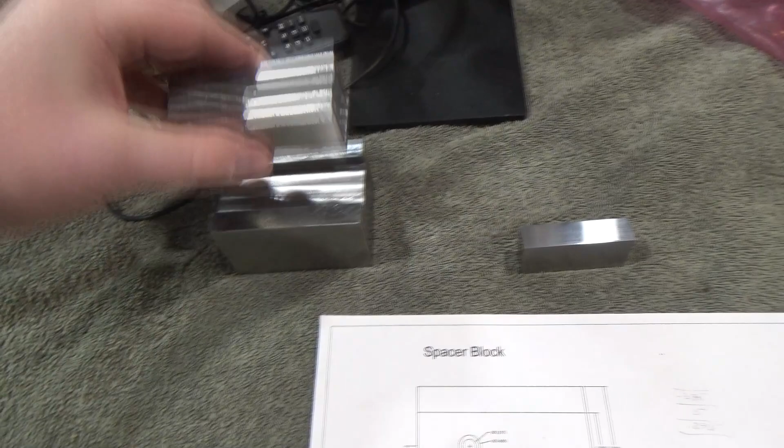I just received Tom's part in the mail, and it's looking really good. Everything's a little bit oversized so that it can be ground to match. So it's a little bit bigger than this slot is. I also made my slot narrower, so I've got to take material off here and off the outside of his part. He left 3/1000 a side to be removed so that there's a nice finish.

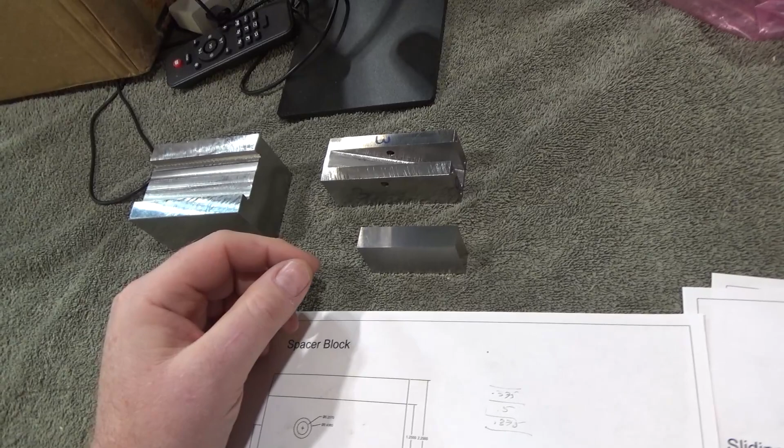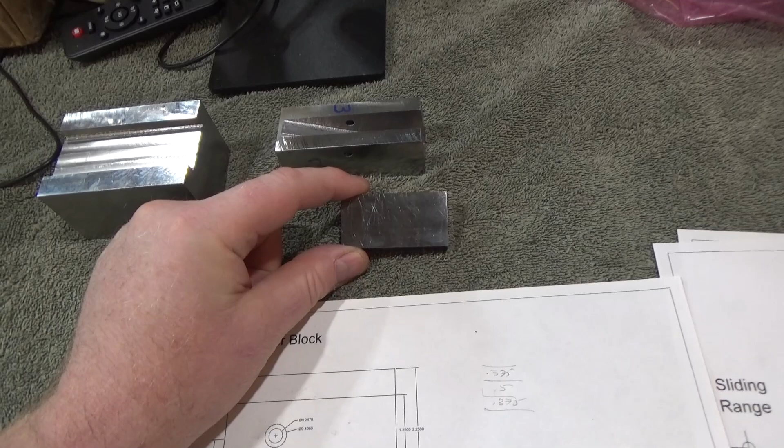And so I've just got to finish this guy here, which I've been kind of hemming and hawing at. So first we've got to drill a couple 6-32 holes in the top to mount some future option on. That was part of Maddie's design that I just carried over. I couldn't actually imagine what it was for, but I'm sure there's some good ideas associated there. And then we've got to cut the 20-degree portion off of this and then do the 20-degree slot. That is going to be challenging work holding after I get to that point.

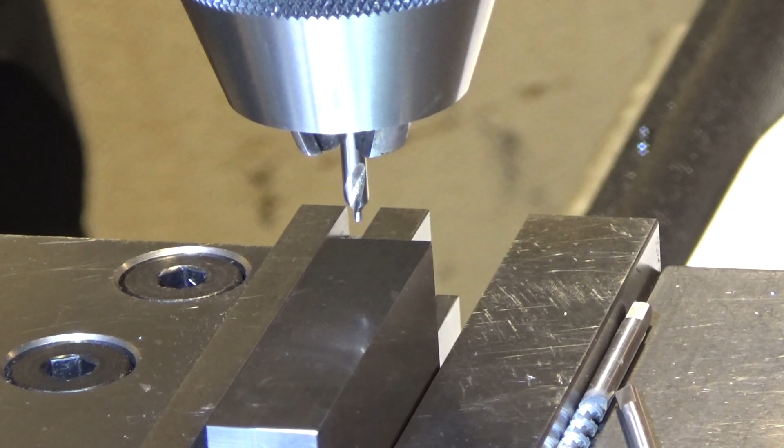So let's start with the easy part and drill and tap. And I say easy, but drill and tapping in pre-hardened material might not be so easy. Never really done it, so we'll give it a shot. So let's just drill and tap 2 holes, and I'm going to center drill them first. So I got the holes started, and I will bottom tap these. I also drilled the holes so they're only like 60% threads or 55% threads. Because of the material being pre-hardened, I wanted to give myself that little bit of a lead.

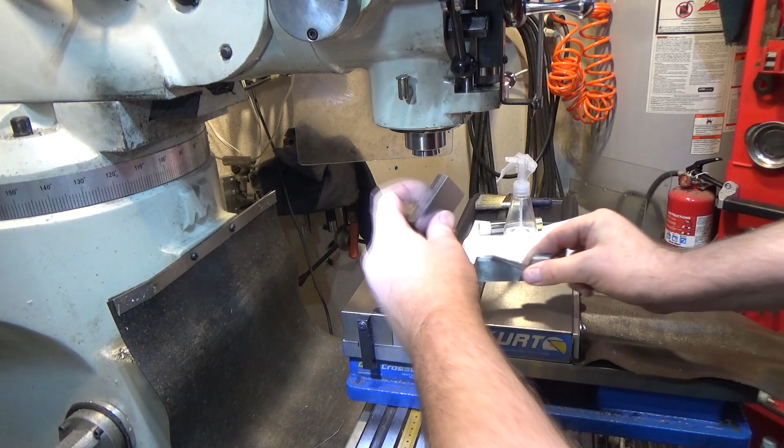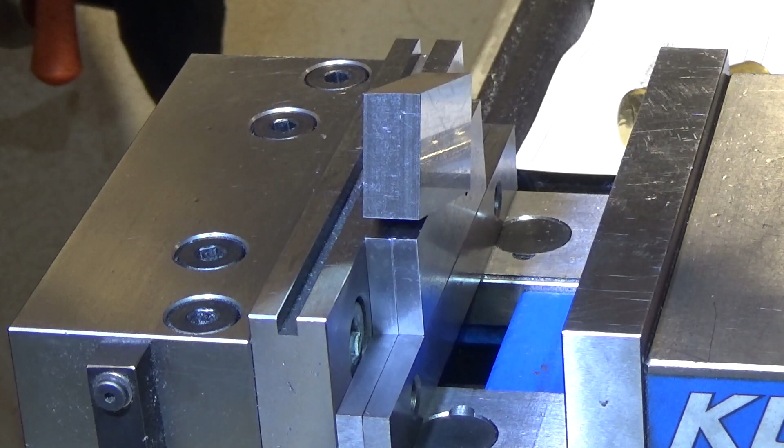So now we basically have to remove all the material until we reach the edge, put it at 20 degrees. So I've got a couple of 20-degree angle blocks with stops here, which are a very useful design. And I'm just going to set it in here. Here's a little bit closer look, and the beauty about what I've got going on here is that the thickness of the stock is 0.5040, 40 tenths over 0.5, so a couple 1/4 inch parallels, a couple 1/4 inch angle blocks won't touch the part, and I can still clamp it. Just try to see how this guy cuts.

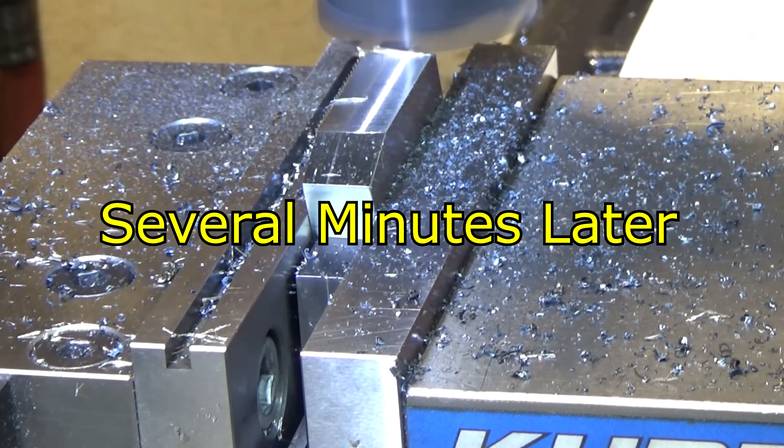So I'm double checking between cuts to make sure that the part doesn't move, because this is not an ideal way to go, but cross-cutting wasn't working very well. So pushing into the vise that direction, which makes more sense, was having a little more issues. So I found something just above my final zero, so I know when I'm getting close, and I zeroed my DRO on that, so I can slowly walk it in at that point. So we're going to do another 4/1000s. And we're going to call that good. We're going to grind the rest.

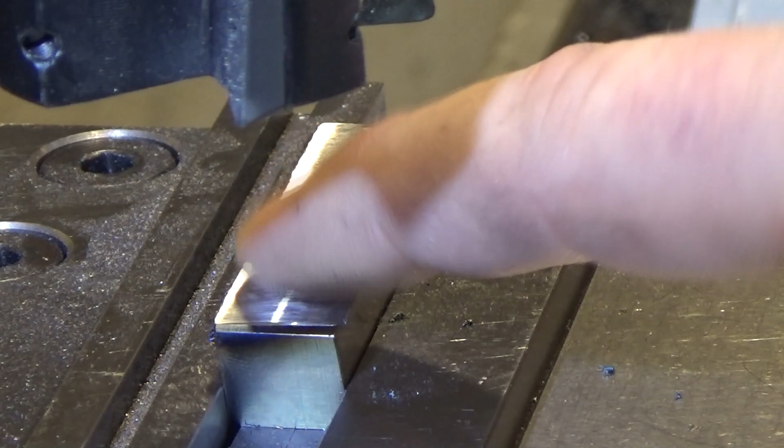So I don't know if you can see this right here. It's not a perfectly straight line. It angles back a little bit this way. And what that kind of says to me is that maybe the tram of my head has moved since the last time I trammed it, which was, I don't know, 2 or 3 uses ago. And so that means it's cutting a little bit more on this side than it is on this side. So we need to fix that. But I'm going to grind the rest in, and we will come back.

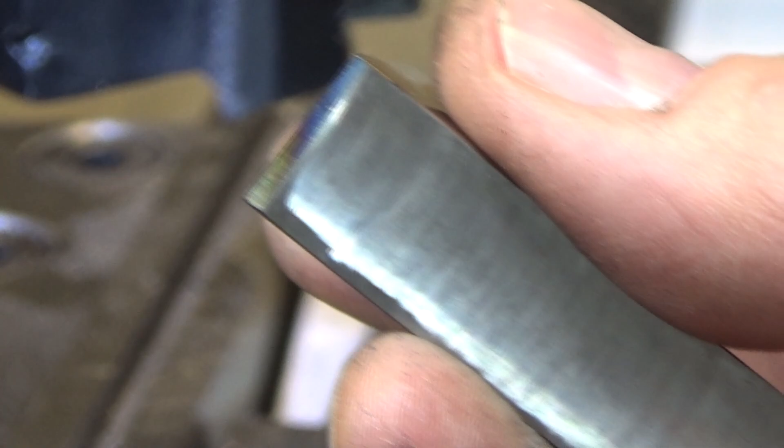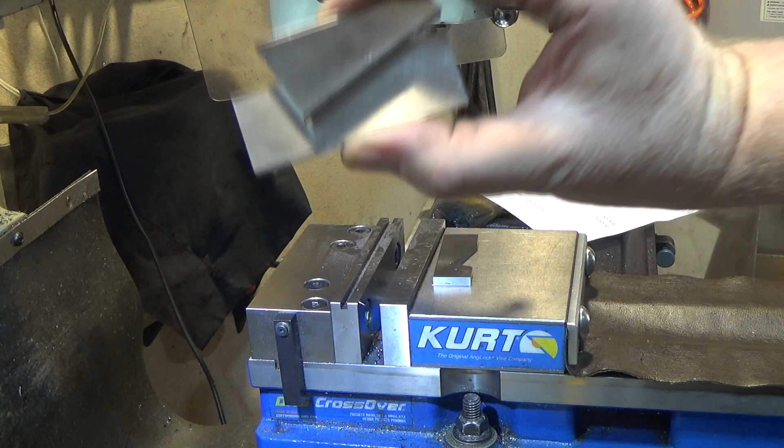The face mill actually did a pretty decent surface finish, all considering I've just deburred it. And you can see there on the end what I'm talking about. While it's not a perfectly perpendicular line to the face, because I ground the faces parallel to each other, that should also be a perpendicular line, which it's not, which means probably head tram, which I will double check. And if you're wondering, it did not slip off the blocks. That is a really good fit on the block.

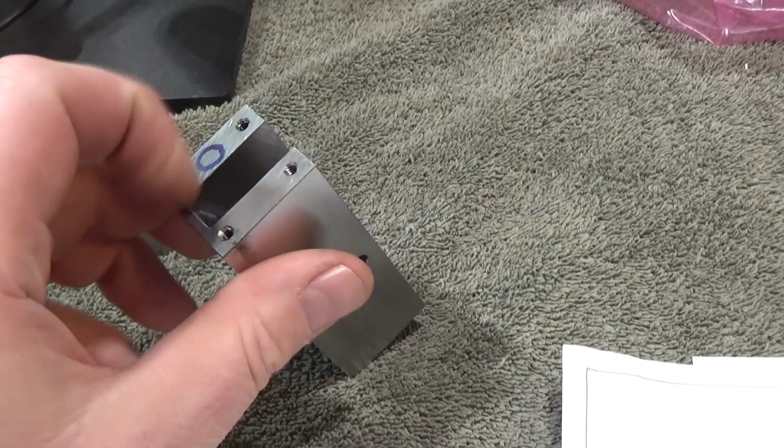So this part ultimately is going to match this part. But before I move forward, I need to square this guy up and remove the excess material he left on here for me to probably get rid of some of the tooling marks. So it's 3/1000 a side except for this end here, which I'll just dust off just to clean it up. But the other sides, we're not looking for anything in the tenths or anything like that. We're just looking for something nice. This is a machinist jack.

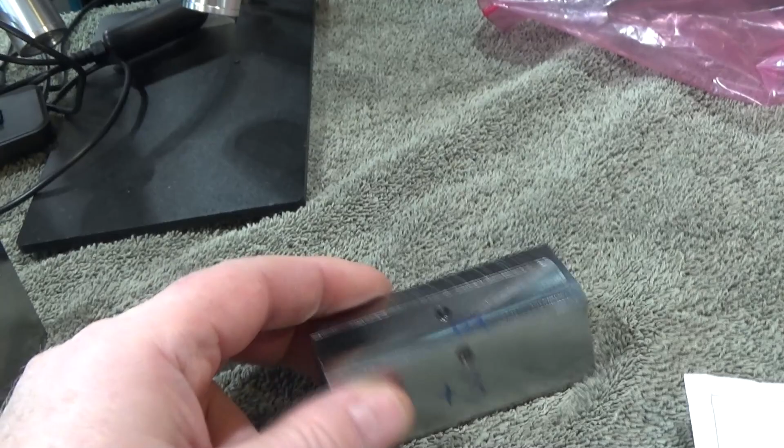So as I'm dusting off the outside parts, I'm not going to film that part because surface grinding is sort of hard to get on camera, because the camera always needs to be right where I need to be. But when I set up for doing the inside here to grind out the inside, then I'll bring you back, because that's going to be involving a process I've never even done before.

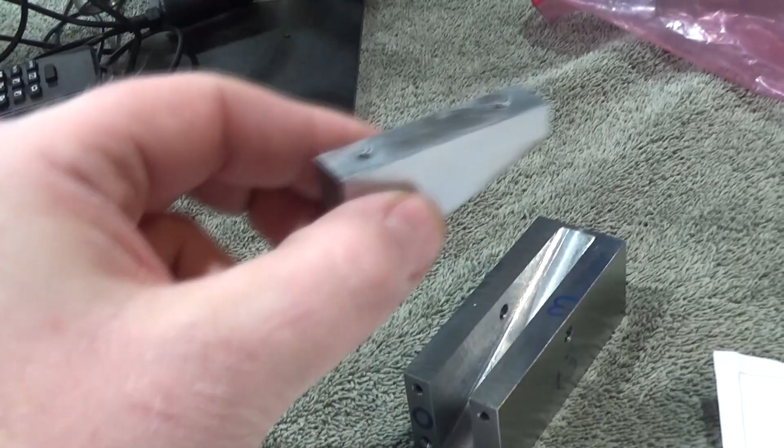So I've got to side grind these things, the walls here, because apparently he got a little bit of a taper in there, and we need to take that out. And then once I get that final dimension, then I will grind this one to fit in there very nicely. So I'm not quite sure how I'm going to pull that off, but I'll bring you back in a bit.

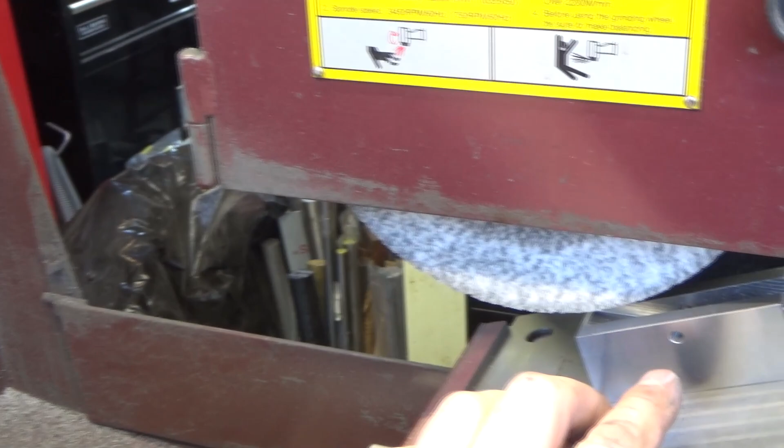So what I did was I got my magnetic sine plate, one of my prides and joy, a used Suburban Tools magnetic sine plate that I got, very fantastic. Set that up at 20 degrees with a bunch of gauge blocks, tightened it down. Then I dressed a 1/2 inch wide wheel. There's a 1/2 inch slot. This is really close. It would have been better with a 1/4 inch wheel. Didn't have it. I relieved a bunch of material except for like the bottom 1/8 inch here on the sides.

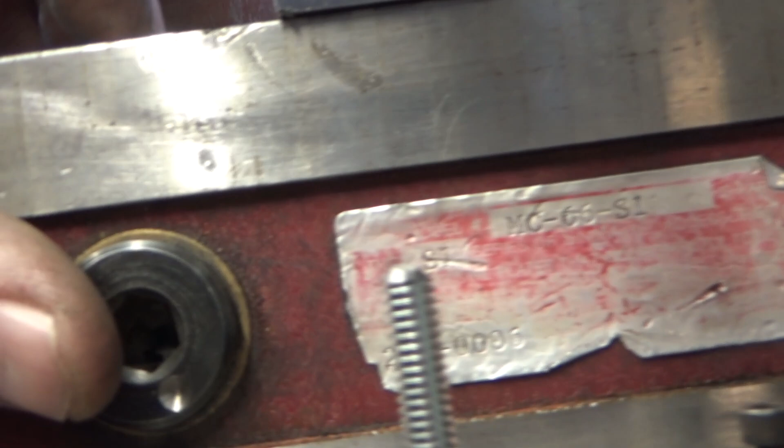So what I'm going to try and do is get the center first, and we're just going to try and clean up the bottom of the center first, and then we're going to try and side wheel and clean up the sides and get them square. And then once I've got that dimension, I can cut my other part to match.

So I don't know if it's going to be useful to show this because the camera's in my way, so I don't know if I can give you a really good angle to see what's going on. But this also is a pretty big bite, another reason to have a 1/4 inch wheel. So I'm going to try and just go down a couple tenths at a time.

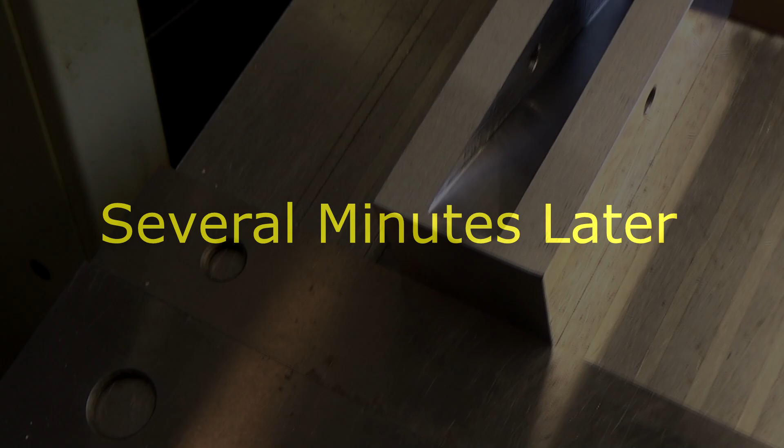Several minutes later. Hopefully you can see this, but we've cleaned up the bottom. Now we're just going to try and side wheel and do the sides. I've never done this, so it's going to be pretty challenging, I think.

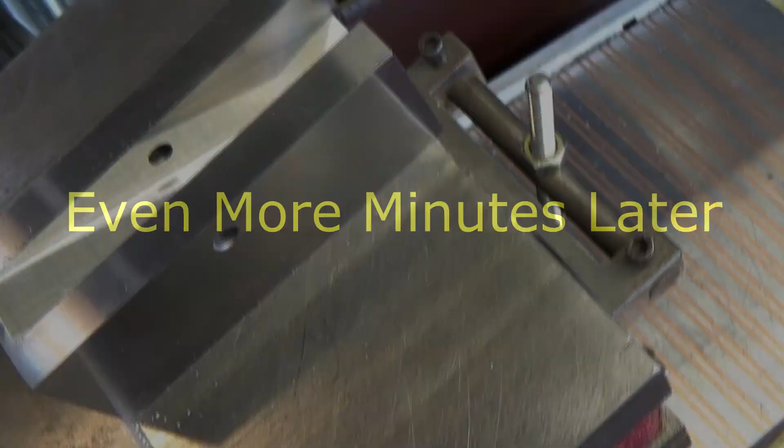Even more minutes later. All right, so I don't know if you can see this, but I cleaned up both sides with side wheeling. It worked out very well. This is a very open structure wheel, 46 grit, and I think that turned out beautifully. Now, whatever this width is, is what I'm going to try and match with the other piece, rather than go the other way around. This was a lot easier. I actually got a little bit of burrs on the top. That's amazing. Beautiful finish though.

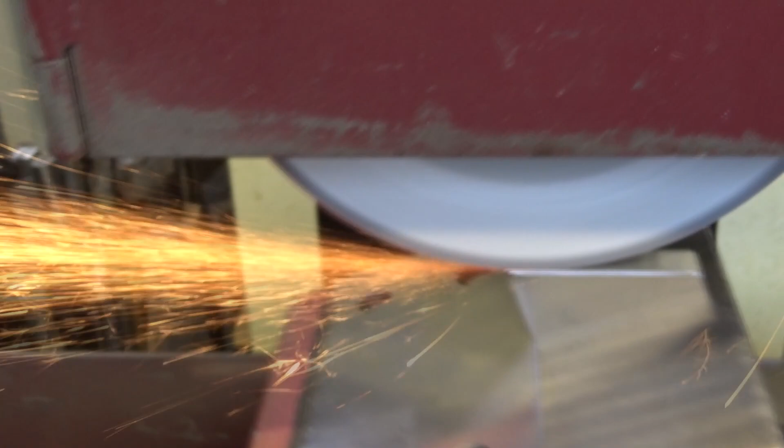All right, let's make the other piece match the angle. So since I've got the compound set up, I'm gonna flatten the angle on the other one to match, because no better time than the present, because this is the exact identical angle, and that way I know they'll mate perfectly. One thing that's really good news is that it's taking an even cut all the way across, which means that the angle I got originally is very close to correct.

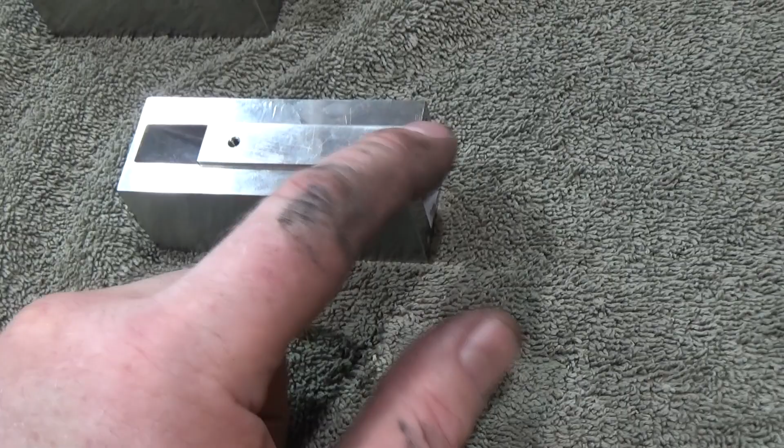All right, so this is extremely smooth. I made it about 4 tenths undersize, 3 or 4 tenths. It is a really close fit. You can't feel any wiggle at all.

And what I had to do, besides chamfering the bottom, was relieve the bottom section a couple thousandths on both sides. And what that allowed it to do was to make up for the fact that apparently the wheel deflected a little bit on the bottom. It's not perfectly square on the last 25 thousandths at the bottom. So I'm pretty happy with it though. It's very, very smooth, no wiggle. I think it'll be very nice for Max.

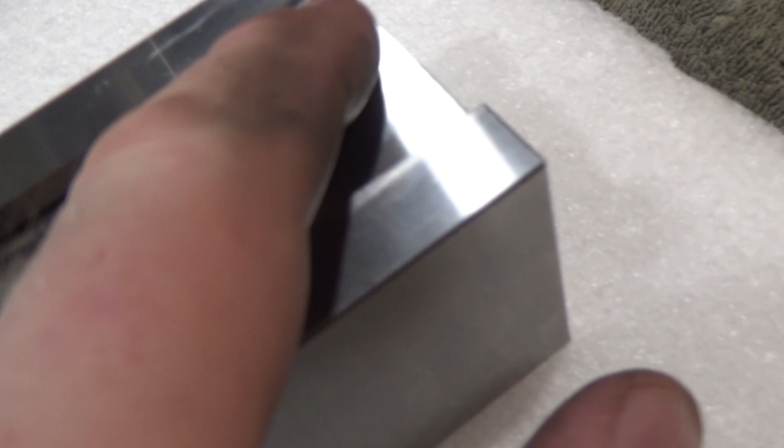Alrighty, so I just ground this guy and just cleaned up the sides. It's amazing, just setting it on there it scratches. It's not that hard. It would be nice if it was a little bit harder, because I cleaned everything every time, but still ended up with some scratches. And then while I was surface grinding the inside section here, I slipped with the infeed and buggered the corner of this and heated it, which is really bugging me. It doesn't affect the quality.

I still have to drill a clearance hole through here for 1/4 that'll go into the bottom of this guy, and also have to do the relief for the head. That's coming up next. But here's the fit. It is a really nice fit. It's like a 1/2 thousandth oversized, just like this guy was. So here's where we are. And I calibrated this height here.

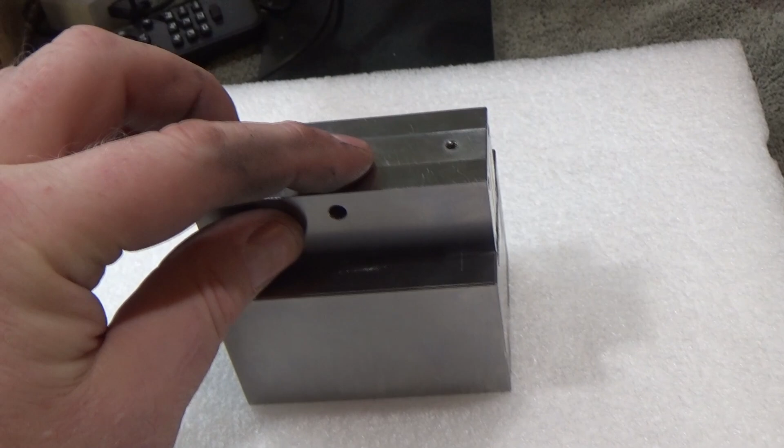Ooh, I think I have to take a little bit off because this is protruding back. When this is flush, this might be sticking up high. I need the rear piece to this guy because I need to make sure that this thing's not proud, because right now this height combined is 2 thousandths under the height of the Kurt vise, and this is just a little bit more than that. So we're gonna have to fix that. We got to remove a little bit more material off the back side of this guy here.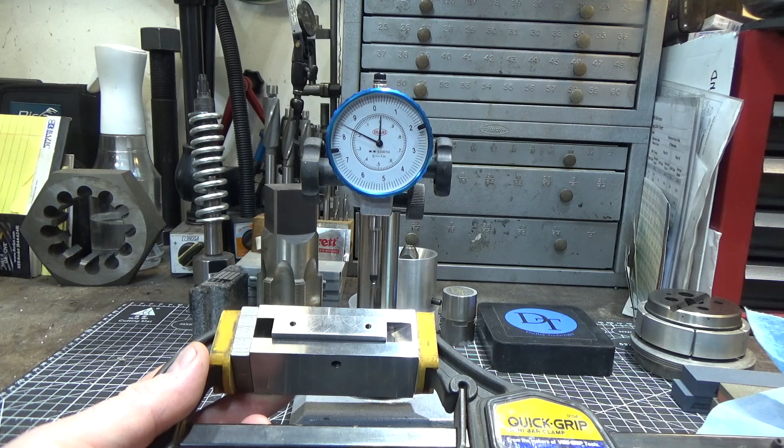All right, so we're getting down to the last couple operations here. One thing I need to do is tune the thickness or the height of this guy when it's all the way back against the end here. So I've clamped a piece of ground stock up against the back, just with a really quick grip vise here. It doesn't matter because it's the material that's pushing flush against the ground section that matters. That's just providing a little bit of force. See, this is a little bit proud, and I only gave a couple thousandths clearance for the comparison between the height of the Kurt vise.

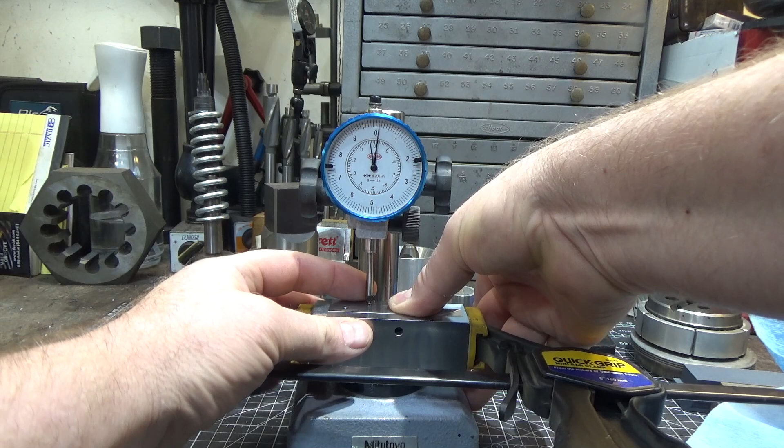So what I need to do is I need to measure how much material I need to come off. So we need to drop this down, set my 0. All right, so this is a little awkward. So this is a tenths indicator that I've got on here. So we're sitting at 0, and it's going to step up a little bit here to get up here. And it looks like we have to take off about 4/10 of material to make it flush, 3.7. So we're going to set this back up in the grinder and take it down about 4/10. That's it. Several minutes later.

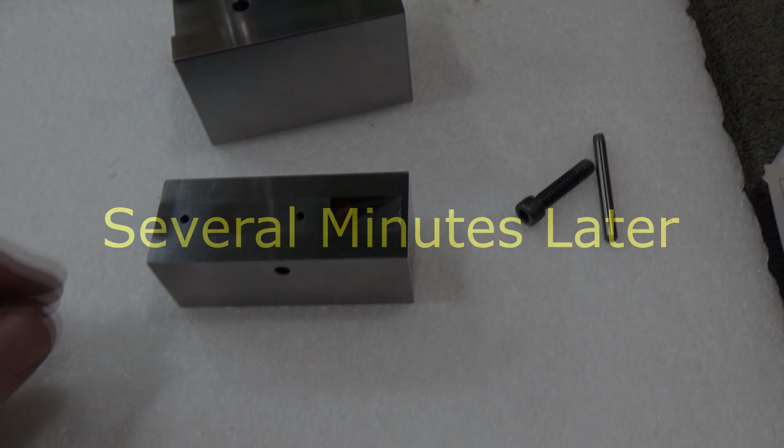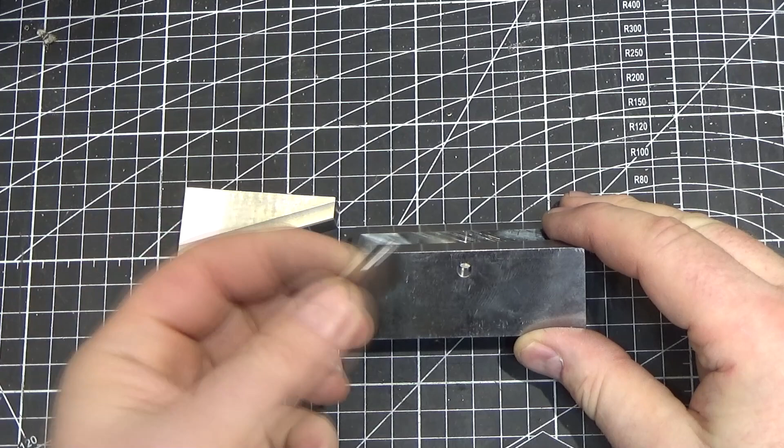All right, tough to show on the surface grinder the work there, but you can see that we got a very nice fit now when this is all the way back. All right, so the final operation I need to do is this guy here gets a pin. It gets a 3/16 pin through here, but it's set up as an interference fit, and I don't have any undersized pins for that. So what I need to do is I need to just verify the height of this pin above the base of this slot here.

Alrighty, so I found a pin that'll fit through here. It's 0.186 instead of the nominal 0.1875, which makes sense. It's 1.5 thousandths undersized. And then I went and found a couple of pins. Here's one that won't fit underneath here. It just starts to fit underneath at this side, but won't fit underneath at this side. So there's a slight angle on this guy. And here's 0.162. 0.162 fits underneath.

The calculated value should have been 0.156 off the base, so it's a little bit off. It's about 6 thousandths off, and that could be because I machined this. I didn't machine this sloping portion to any specific depth. I machined it so that it would be just cleaned up because I didn't know how much material I could take off. And so that's my bad. Tom probably had his hole spot on.

All right, so here's my work holding situation. two 1/2-inch parallels, a 20-degree angle block that mates up with the 20-degree angle on top, and then just tightening the vise into that whole thing. It's supported by about 3/4 of its height there, and then we're going to put the slot down here where the parallels are not. First, I'm going to pre-drill out most of the material. I'm going much under the size this time. It's a 3/16, and I'm going to a 1/8 inch drill bit.

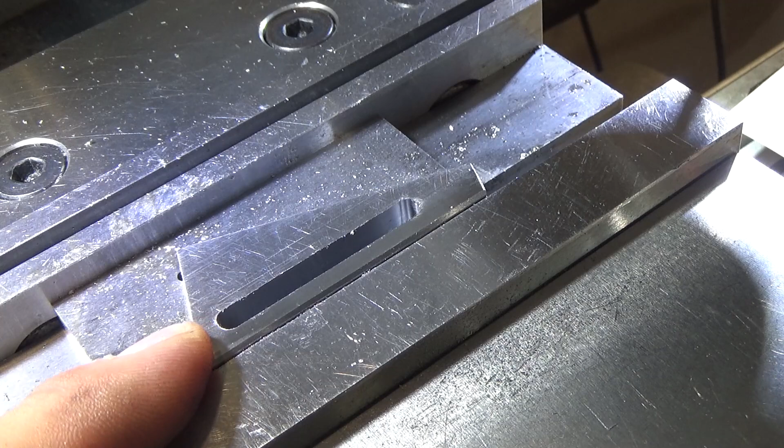So I think I found my approach for next time when I have to drill a deep slot in something. Just go well undersized with the drill bits, remove most of the material, and then come back with a larger one after you're done. And it took a couple passes back and forth just to clean up all of the little ripple marks. I was at 1600 RPM with this size end mill.

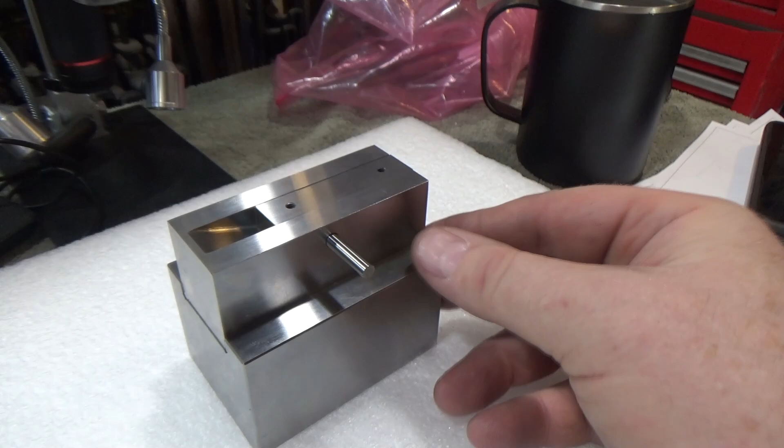All right, so here we are with my part done. I didn't screw the top to the bottom. It's just sitting there at the moment. I think it lines up nearly perfectly. This is a 0.186 instead of a 0.1875 pin in here, and it's going all the way through. And we've got a very, very smooth fit right here. It's pretty nice. And I think we're good.

I went a little bit over on the slot width so that if any material ever had to be taken off, it could. So it went a little bit proud of this side, which will be stopped by the end plate anyways. And then it goes up for the little over 0.5 inches of coverage. So it's got a ground finish pretty much everywhere.

One thing I thought might be useful would be to put some relief slots in the bottom here so that it didn't make contact everywhere, so when there's a lot of pressure pushing down, it came freely. But it's so smooth that I didn't bother. We'll find out when Tom assembles the whole thing. But I think we're good to go. They just need to put the end cap on and the screw, and this project should be done.

And we can send it off to Australia, where Maddie's making a box, I believe. I'm not sure about the latter part, but I think that's right.